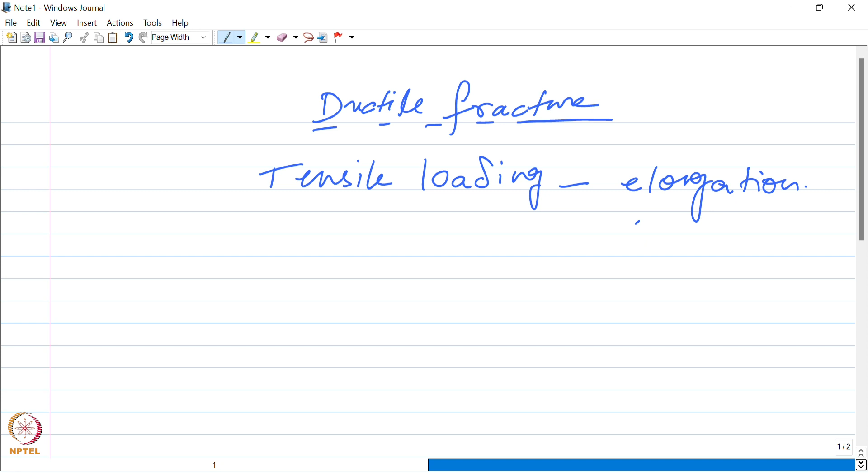When a metal is loaded in tension, it will elongate, which will lead to a localized reduction in the diameter or cross-sectional area. This is a phenomenon known as necking. So, the ductile fracture in metals is generally preceded by the necking phenomenon. Okay? And necking generally happens at the maximum load.

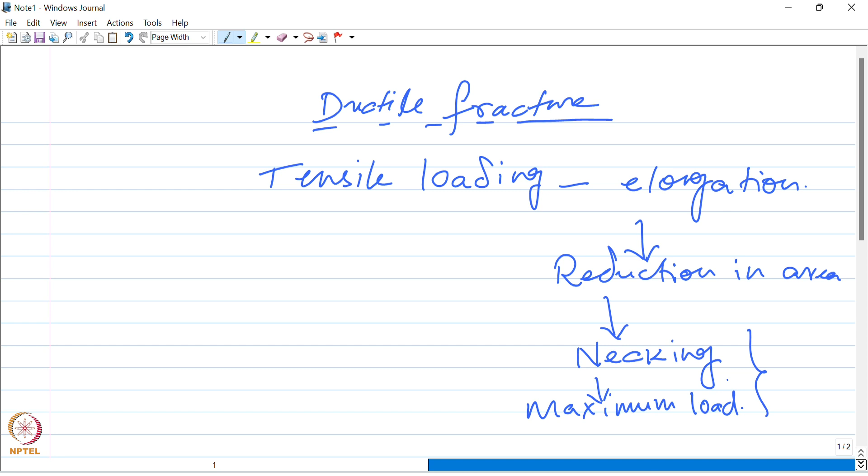Alright? So, an ideal plastic material which does not go through any strain hardening would become unstable when subjected to tensile loading as soon as the yielding begins. Okay? But in metals, generally strain hardening will occur.

And therefore, there will be two competing phenomena that will occur during the tensile loading of a metal. Okay? One is of course the reduction in the area, as I said, which will result in the decrease in the load bearing capability of the metal, and the other is strain hardening, which will increase the load bearing ability of the metal. Okay, so these are two competing factors which will simultaneously occur as the metal is being loaded.

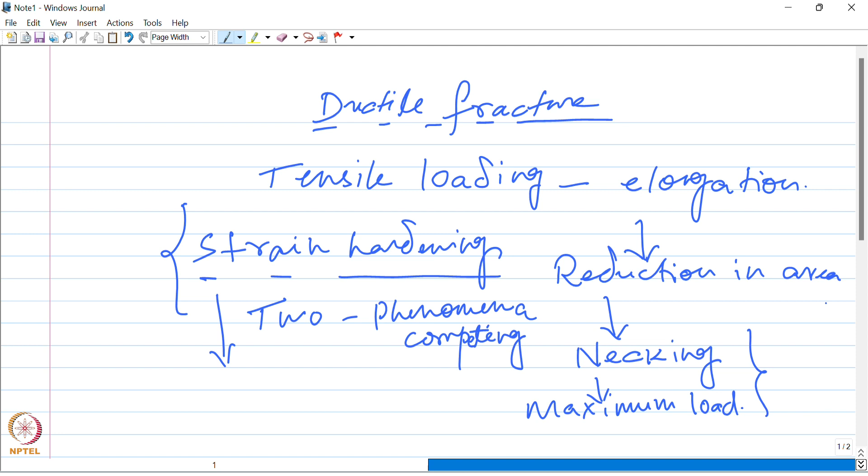Okay, so the instability will occur, or the necking will begin, when the increase in stress due to the decrease in the cross-sectional area becomes greater than the increase in the load bearing ability of the material due to strain hardening. Okay, and this can be written as an expression mathematically by this equation, where P is the load.

Okay, so as I said, there are two competing phenomena occurring. One is leading to an increase in the load bearing ability of the material, that is the strain hardening, and another is resulting in the decrease in the load bearing ability of the material, that is due to the reduction in the cross sectional area. Okay, so that can be represented as dP, that is change in the load, equals 0. Okay,

so now we know that P is equal to sigma into A, where sigma is the stress, or in other words, stress is equal to the load divided by the cross sectional area A. Okay, so if we differentiate this, this is what we will get. And according to the instability condition, this is equal to 0, as we have already defined before. Okay,

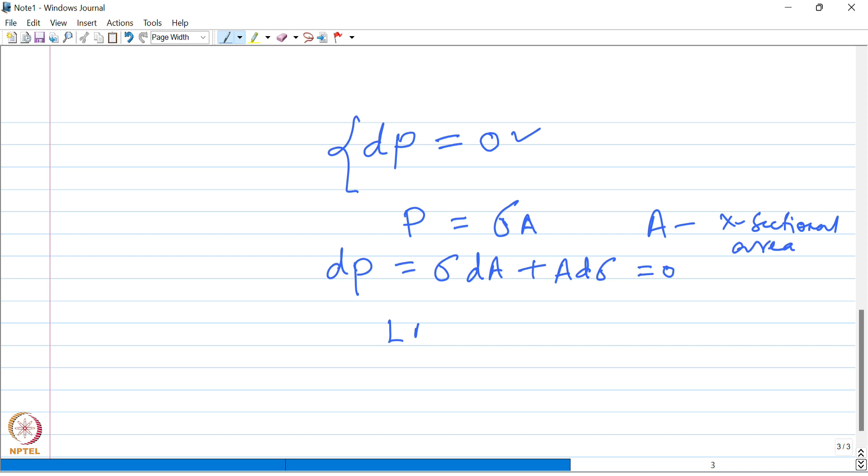now the volume remains constant, that is L into A, where L is the length, is constant, and from here again by differentiation we will get this. Okay, and dL by L, this is nothing but d epsilon, where epsilon is the true strain. Okay,

so now let us see from the instability condition what we get from here. So this is the instability condition. Okay, and if we rearrange this, this is what we will end up with. And just now we saw that this is equal to d epsilon, and therefore we can say that at the point of tensile instability, d sigma by sigma is equal to d epsilon, or in other words, d sigma by d epsilon is equal to sigma. This is the instability condition in tension.

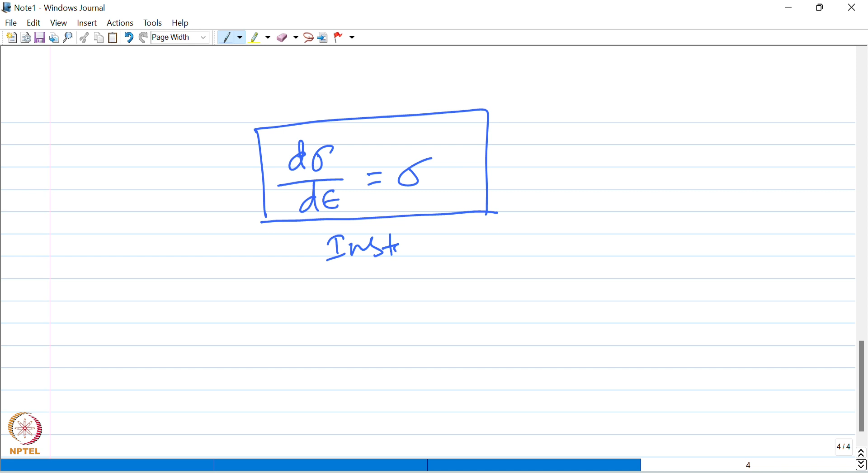Alright. We can also obtain the true strain at which this occurs if we consider this equation between true stress sigma and true strain epsilon. They are related by this equation, and from here we know that the strain hardening exponent n is nothing but the slope of the plot between log sigma and log epsilon. That is, n is equal to d log sigma by d log epsilon.

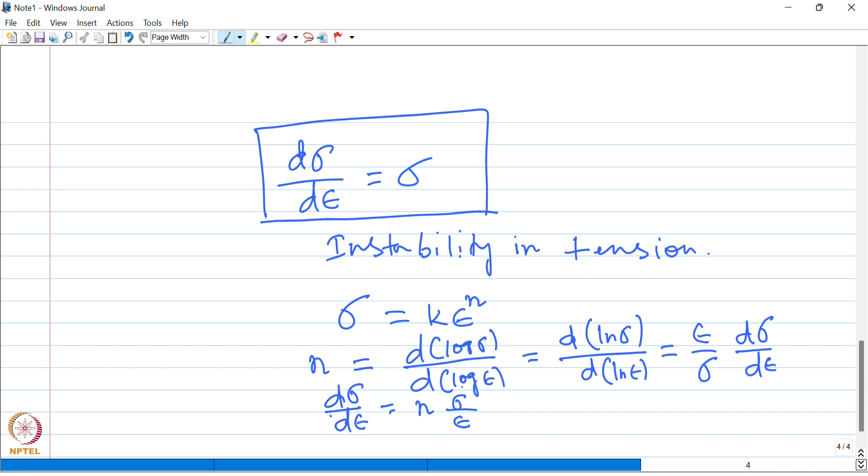That will give us this expression in terms of d sigma by d epsilon, and by rearranging we can also write that d sigma by d epsilon is equal to n into sigma by epsilon. Okay, and now if we put this into the instability criterion, then this is what we will get. Okay, so this is our instability criteria.

Okay, and now we have got d sigma by d epsilon is equal to n into sigma by epsilon. So from here we can get the true uniform strain at which the necking will begin. The true uniform strain epsilon u is nothing but the strain up to the maximum load. So if we put this over here, we will get the true uniform strain at which the necking begins is equal to the strain hardening exponent n.

Okay, so this is an interesting relationship. So when the strain hardening exponent becomes equal to the uniform true strain in the material, the instability in tension starts, or in other words, the necking will begin. This can be also represented graphically if we plot this equation along with the true stress strain curve.

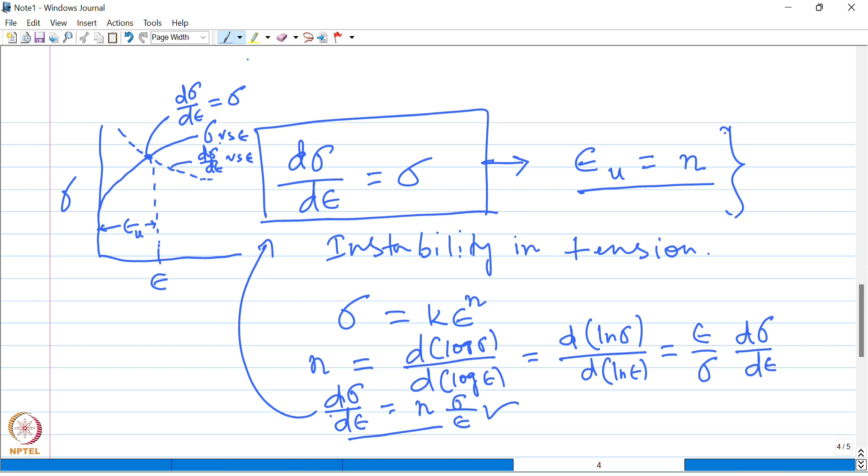Therefore this will be the uniform true strain, and at this point we know that d sigma by d epsilon will be equal to sigma. Okay, so this is how this instability criterion can be represented graphically also. It can also be expressed in terms of the engineering strain. So if E be the engineering strain,

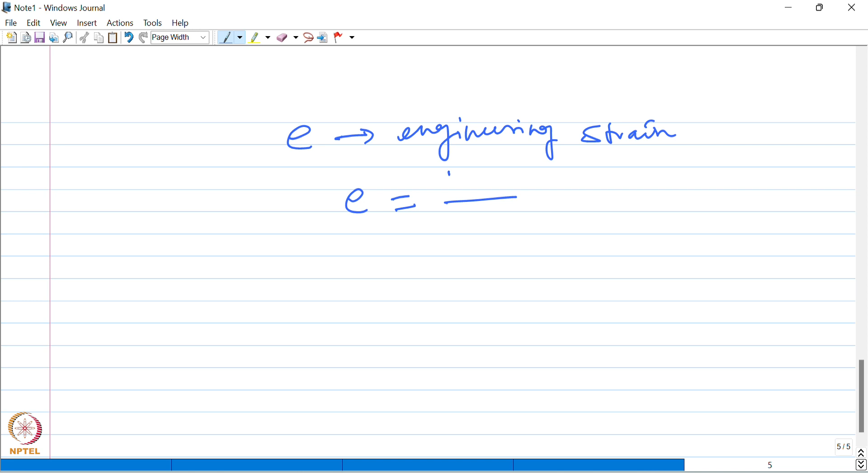that is nothing but L minus L naught divided by L naught, where L naught is the initial length of the tensile sample. So now if we go by this, we can write it in terms of this also, by bringing in the engineering strain E.

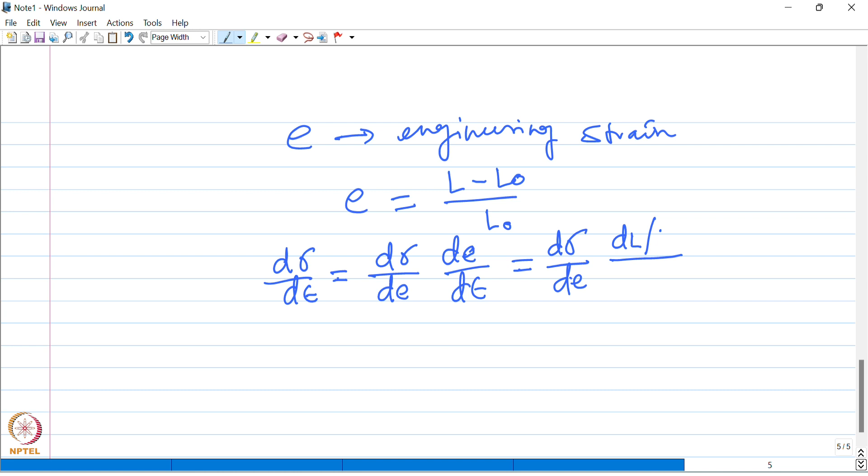So dE can be written as dL by L naught. Similarly, d epsilon is dL by L. And this whole thing is equal to 1 plus E. If we reorganize this, you would end up with this 1 plus E, right?

And this is equal to sigma according to the instability criterion, right? So this gives us d sigma by dE equals to sigma by 1 plus E. And this gives rise to an interesting construction if the true stress is plotted against the engineering strain. Okay, so if that is done, the curve will look like this.

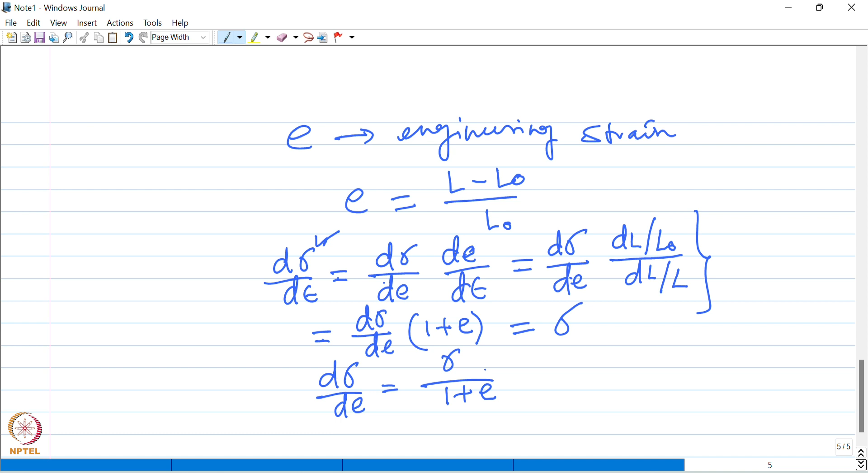And let's say here A is a point which represents a negative strain of 1. Okay. Now if we draw a tangent from this point A to this curve, that will give rise to a point on this curve which will represent the point of maximum load.

Because at that point, as you could see from here now, the slope, that is, d sigma by dE, is equal to sigma by 1 plus E. Okay, that's what you can see from here.

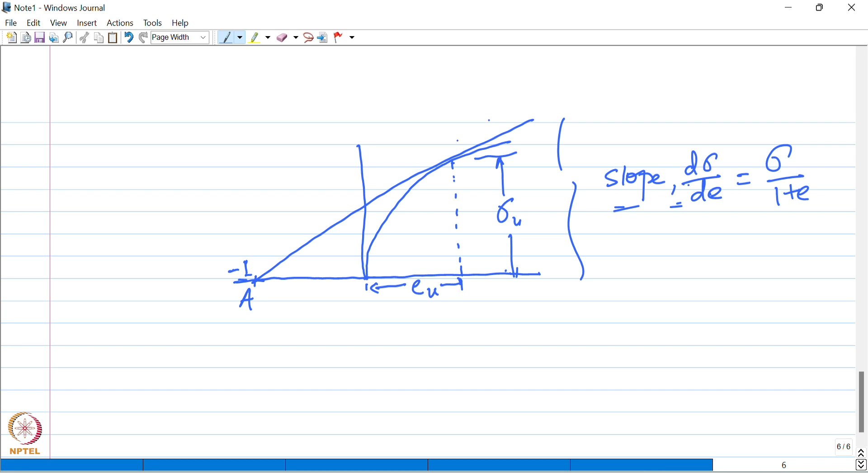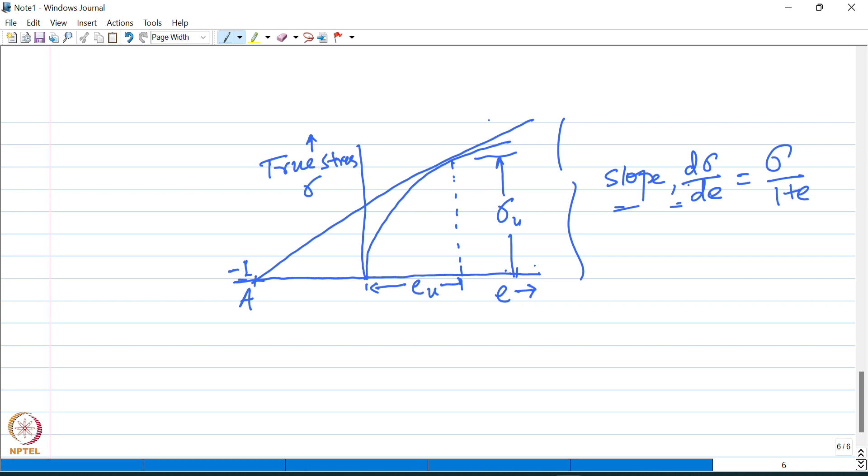So by representing this in terms of the engineering strain, you can also obtain the strain or the load at which the necking will begin. Alright. So now let us see what exactly happens when the necking starts and how does the material eventually fail. Okay. So let us see what is the mechanism of that failure.

So when the necking starts, it will lead to the introduction of a triaxial state of stress around that neck region, as you could see from this particular drawing over here. And due to the introduction of this triaxial state of stress, voids will be nucleated around that region, as you could see from the second image over here. Tiny voids or cavities will nucleate around the neck region.

So as the material is strained further, as the straining is continued, these voids will grow and coalesce together, leading to the formation of a crack at the center. So the void nucleation and coalescence leads to formation of a central crack, as you could see over here.

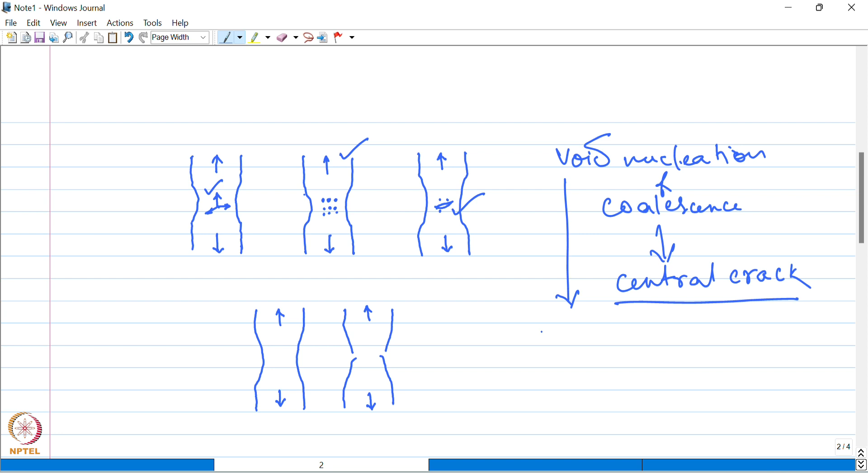And when you talk about void nucleation, voids generally form at sites like inclusions, second phase particles, or fine oxide particles present in the material, and also at the grain boundary triple points.

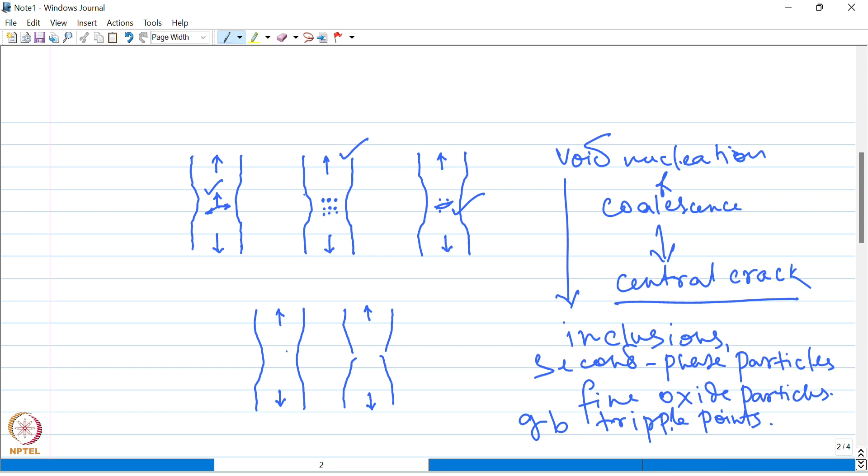So once this central crack forms due to the coalescence of the voids, this crack will grow as the material is being strained further, and eventually it will lead to fracture. These two parts will get separated from each other. This crack propagates roughly in a direction perpendicular to the axis of the sample.

And if you see the finer details, the fracture process first occurs locally at narrow bands of high shear strain. These shear bands are located roughly at some angle close to 50 to 60 degrees to the transverse direction. Along these bands, sheets of voids are first nucleated as the material is strained, and these voids will grow and coalesce, leading to local fracture of the void sheet. Thus the crack growth in ductile fracture essentially occurs by a process of void coalescence.

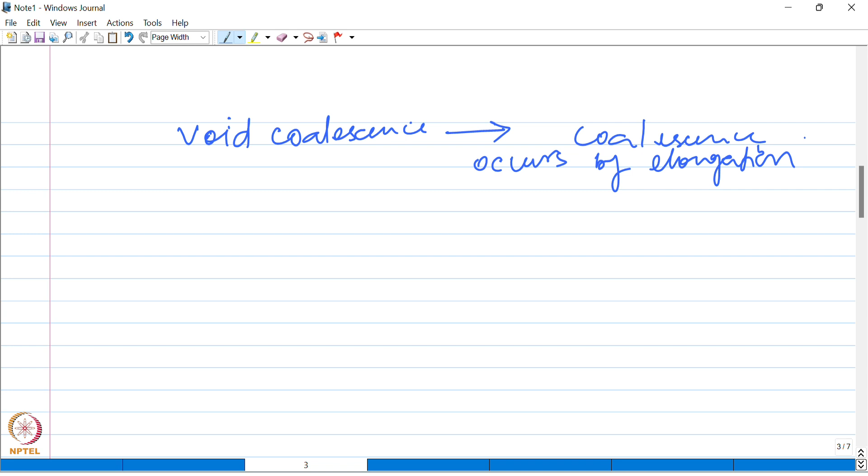And this coalescence occurs by elongation of the voids and elongation of the bridges of material between the voids. So looking at the finer details of void nucleation and coalescence, we can say that the coalescence occurs by elongation of the voids and the bridges of material between the voids.

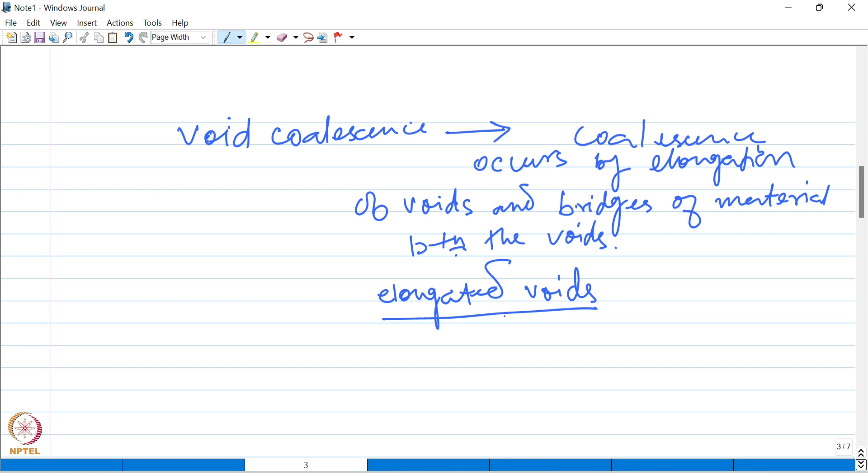So if you look at the fracture surface, you would actually find these elongated voids. But this can be seen properly only under an electron microscope like a scanning electron microscope, because the fracture surface is quite rough, and you cannot really use an optical microscope, which needs polishing of the surface. So if you observe the fracture surface under a scanning electron microscope, you would see these voids. Let me show you how it looks under the SEM.

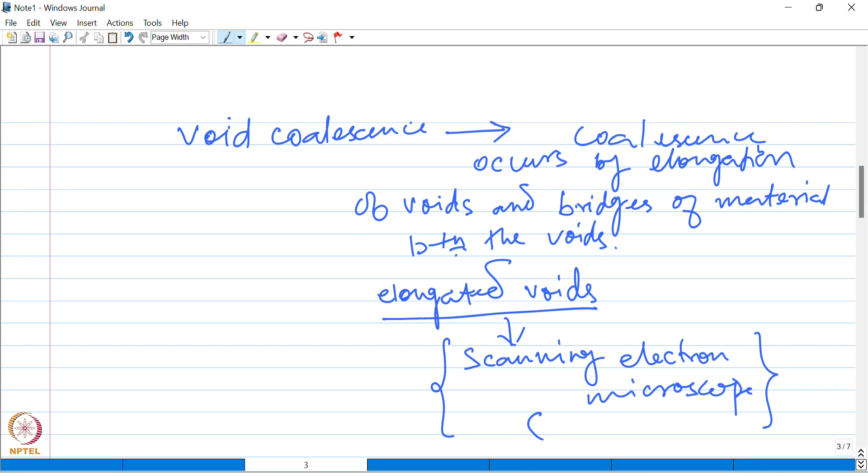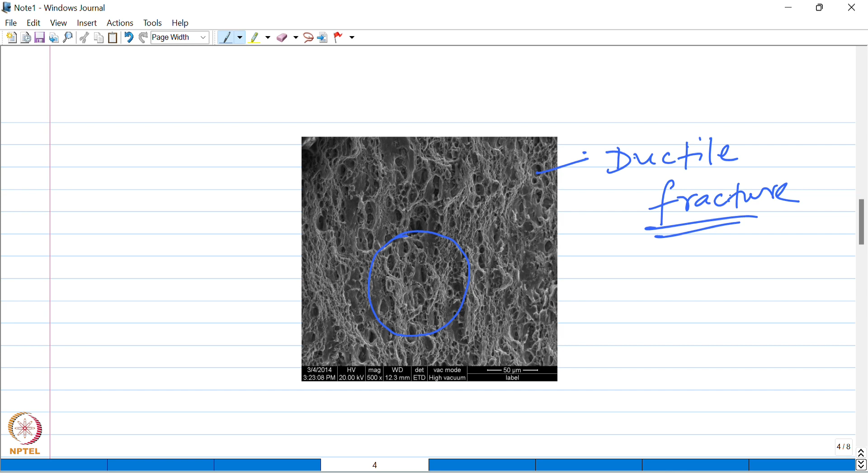So in a macroscopic observation of the fractured surface, if it occurs by the ductile fracture mode, you would see features looking like a cup and cone pair. And on the microscopic level, under an electron microscope, you would see these voids, which indicate that it occurred through void nucleation and coalescence, a characteristic feature of ductile fracture.